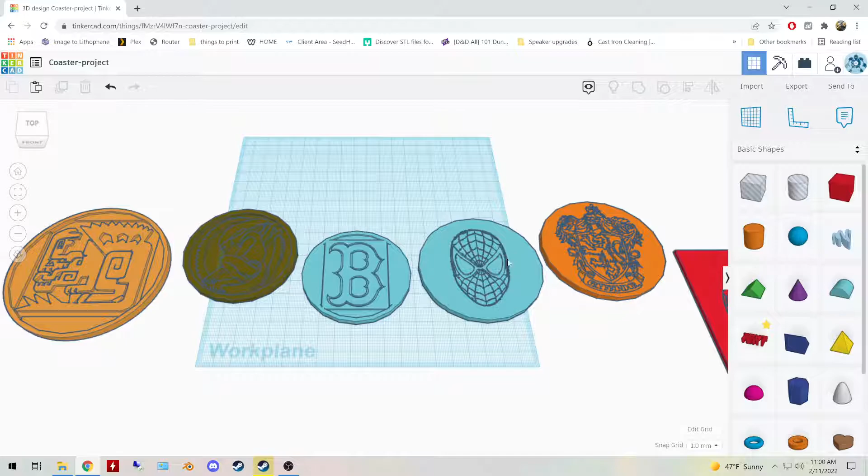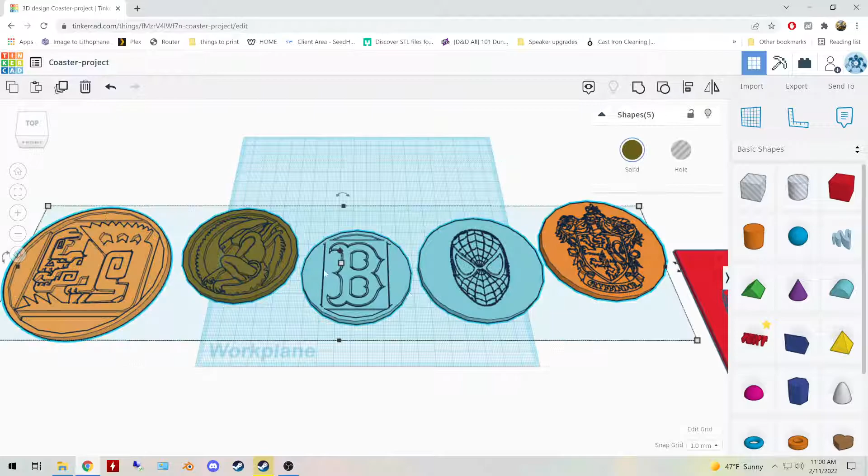And we can jump right into Tinkercad. These are the 5 coasters I showed earlier in the video. Obviously these are in STL form, as well as one other design over here that I didn't show. As you can see, there are a couple different design approaches on display here, which I will now go over.

Let's get these out of the way. First things first, let's import the SVG we just made. I did the symbol of the Alien movies, so I'll import that.

Depending on what image you started with, the dimensions might be highlighted red and you get a message saying the image is too big. But you can just highlight these, and if you punch in a number, Tinkercad will automatically scale the other side. It doesn't really matter what number you punch in, because resizing them in Tinkercad will be super simple.

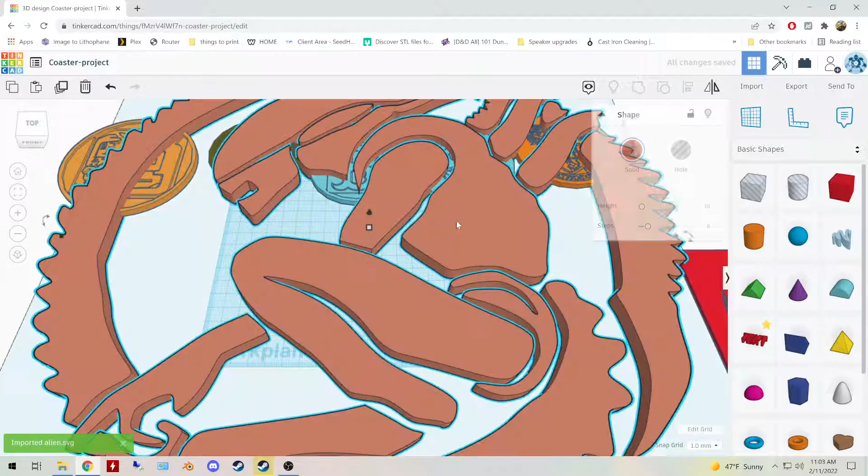Importing sometimes takes a while. There we go. It imported pretty big. Odds are yours did too, but just highlight one of the white corners, hold down Shift, left click on it, and scale it down a bunch. Something a little more manageable. Make it a little bit taller.

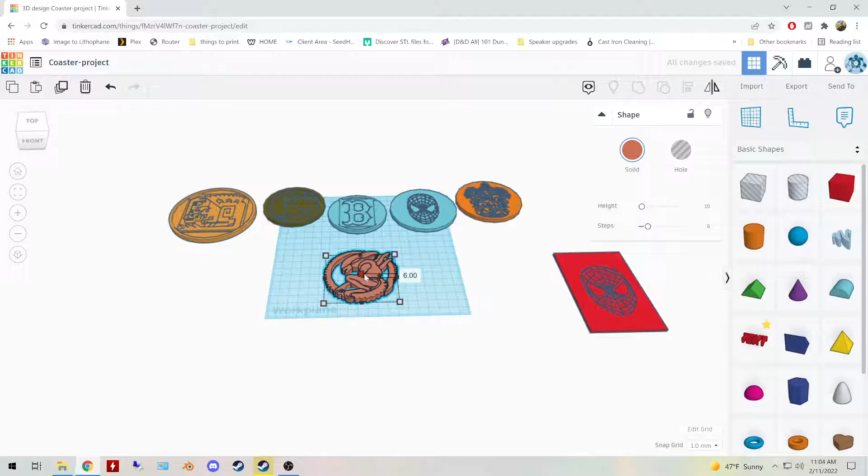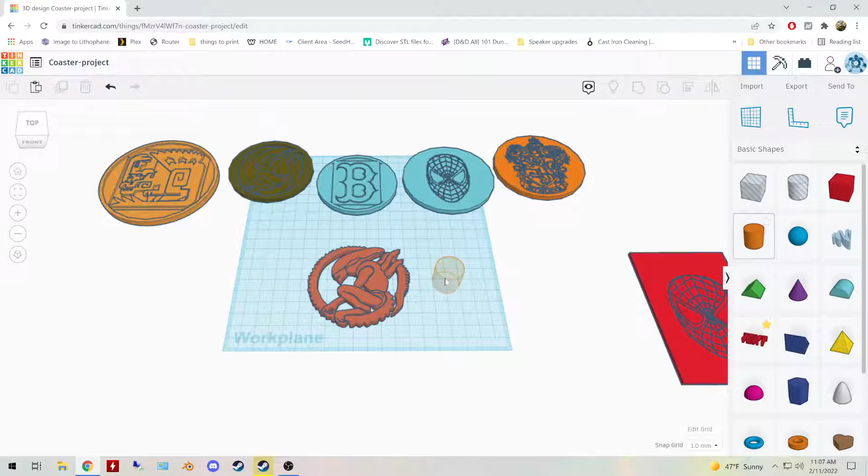From here, the design is a little open-ended. I'm going to try to make a coaster, or maybe a magnet, where you'd glue the magnet on the back. So I'm going to use cylinders, but you could just as easily use any shape that is flat or can be flipped flat—box or rectangle, roof or triangle, heart—all those will work fine, but I'm going for a coaster, so I'll use a cylinder.

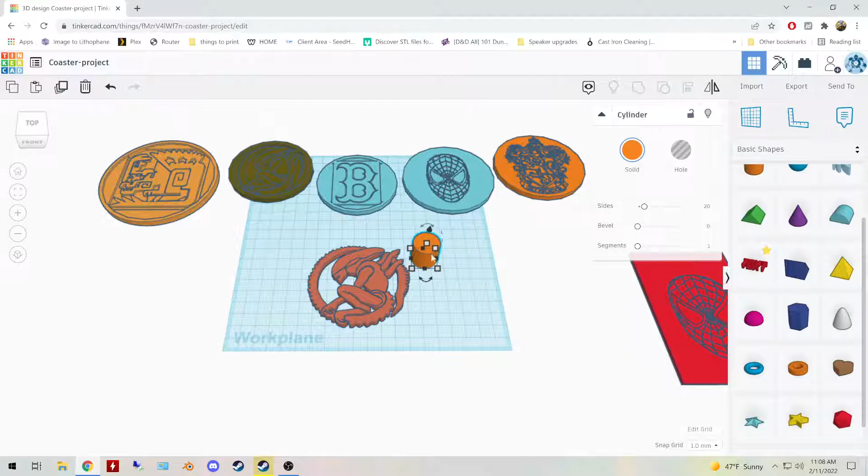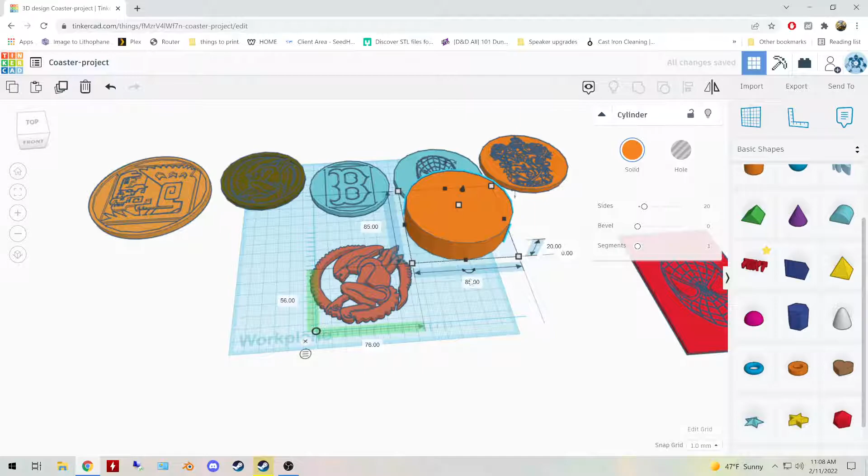I'm going to drag this out. I've found good dimensions that work for this—it works just as well if you want to make a magnet—so go for something between 80 and 90 millimeters. I'll make this one 85. You can set the top to bottom height to either 4 or 5 millimeters.

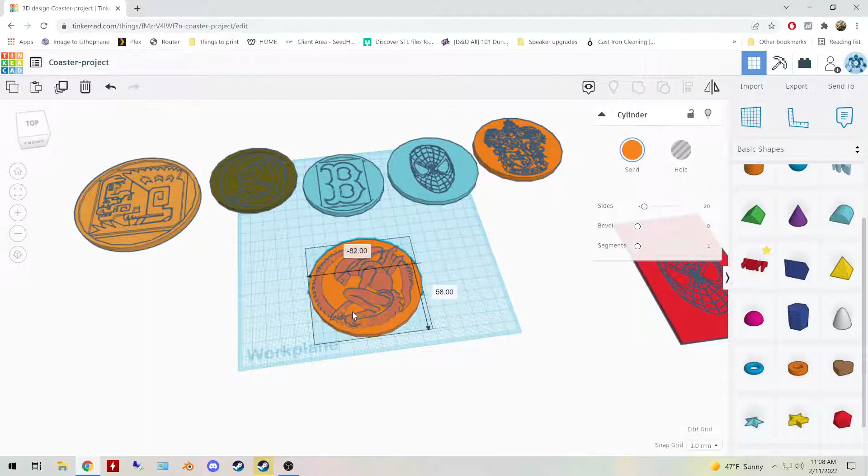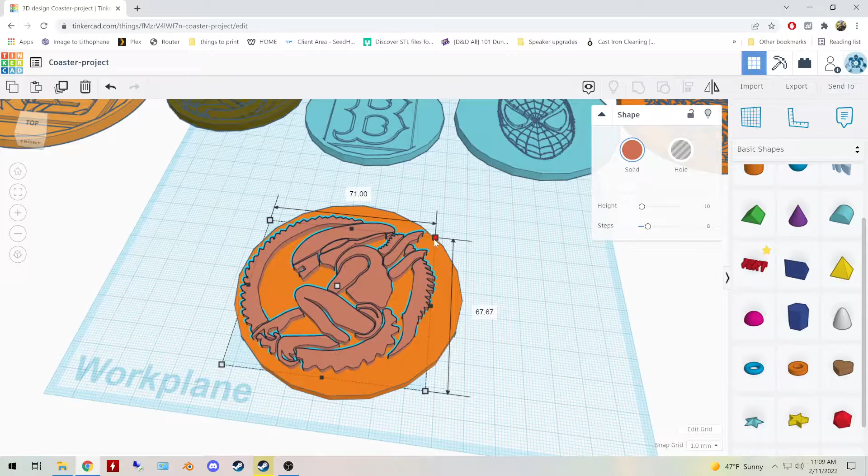Dismiss the ruler. As you can see, I actually wound up resizing the SVG almost exactly, but you can tweak it a little bit more here. Let's lift this up a little bit so we can resize it easier. As you can see, that's poking out just a little bit, so we'll resize it just a tad and reposition it.

All right, I think that's a good size. Maybe we'll lift it up just a little bit. Okay.

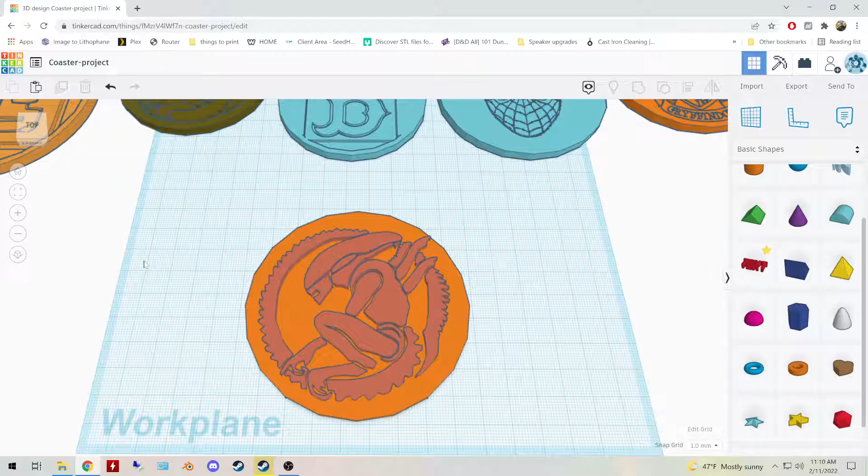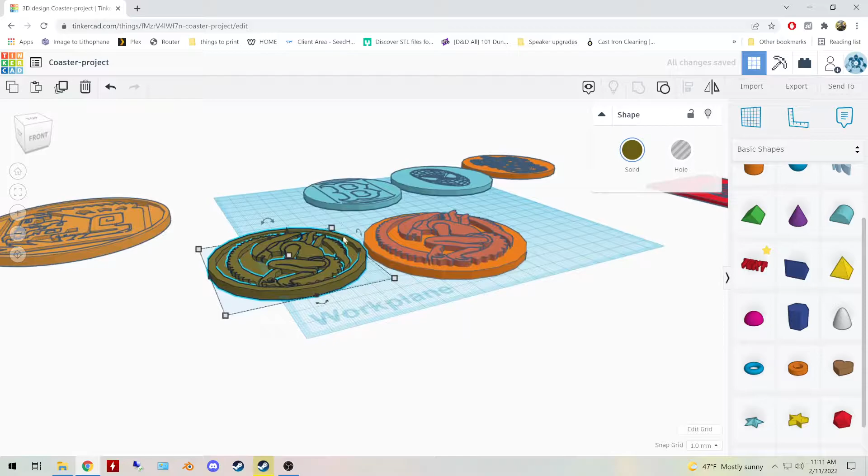From here, I like to think there are essentially three best approaches. We can carve out a rim on the coaster and have this alien symbol solidly sitting in it, shown here—you can see it's sitting in the middle, everything nice and flush.

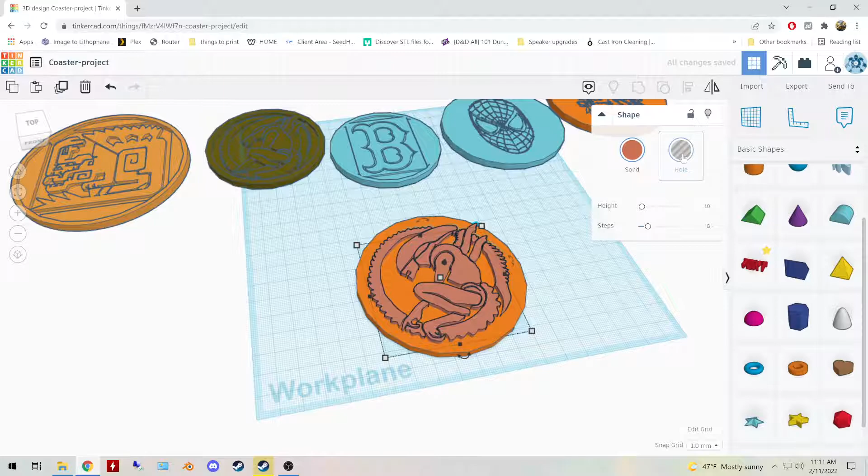Or you can dip the solid object a little bit below the rim to make a small barrier around the coaster, as I did here. Or you can just set this to hole, make some adjustments, and basically punch it in the middle, like I did with the Spider-Man and Gryffindor logo.

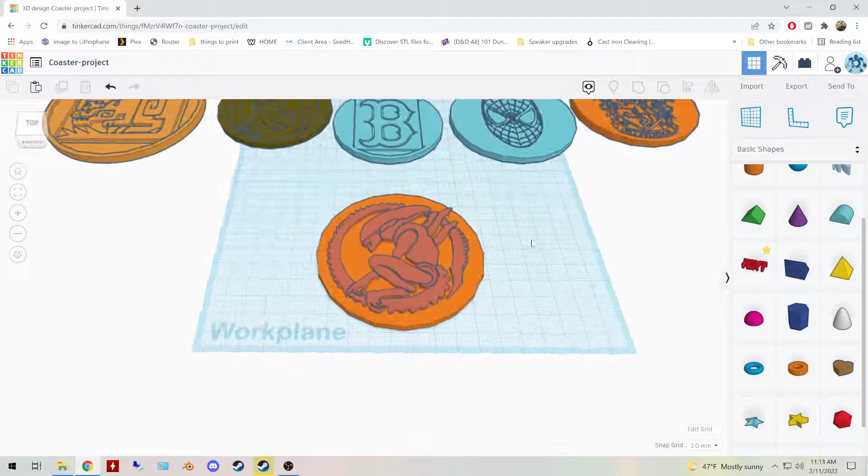If you've watched my other Tinkercad videos, you probably already have a good idea of how to do each of those three designs, but I'll go over them anyway.

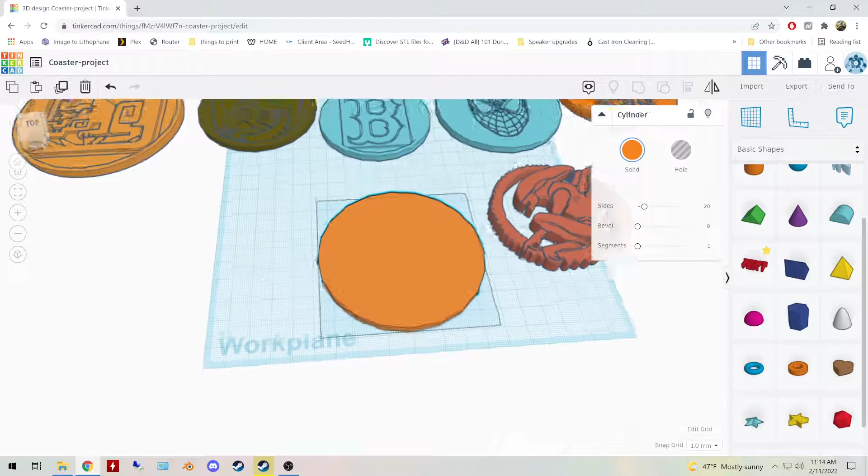So we can push this off to the side for now. What we're essentially going to do is select our cylinder or box or whatever shape you're working with, duplicate it, and drag off one of these to the side. We basically want to subtract the dimensions just a little bit from the original, something in the ballpark of 2 to 5 millimeters. So our original is 85.

I'm going to bring up the ruler by hitting R on my keyboard. The symbol for it is also up here. I'll subtract 3, so I'll make these dimensions 82. Then we can dismiss the ruler, and we just need to move the slightly smaller object up 1 or 2 millimeters. Easiest way to do that is to hold down, on Windows, the Control key. On Mac, I believe it's the Command key. With that held down, just tap the up arrow on your keyboard once or twice.

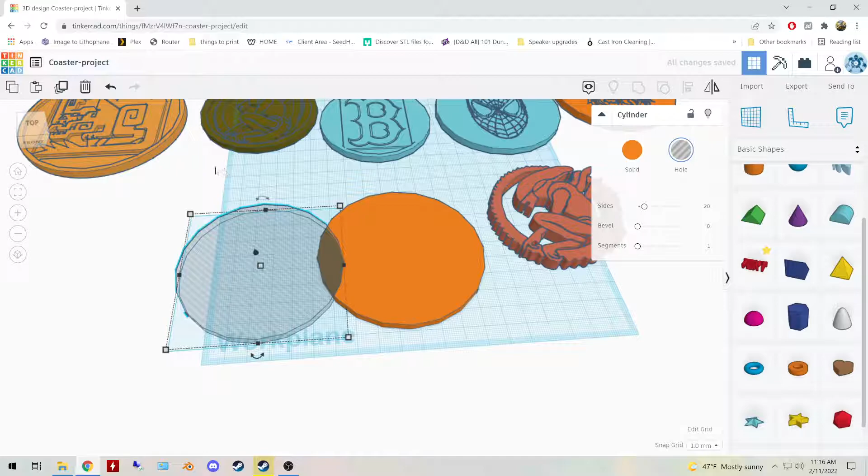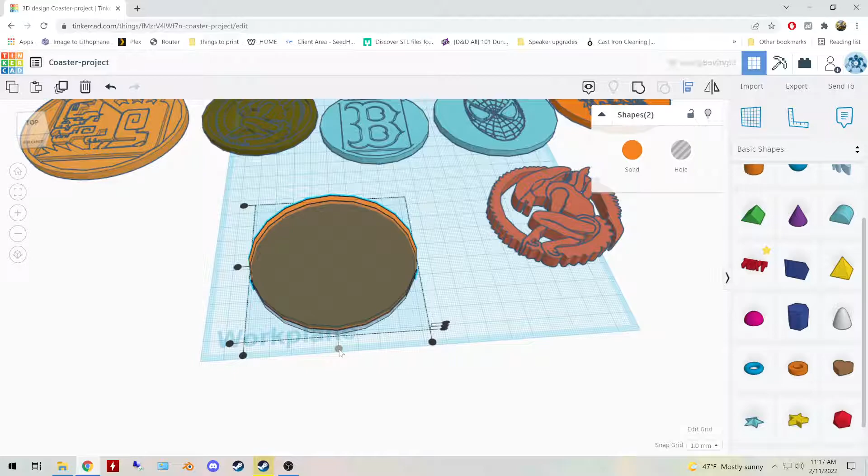You can change this to hole as well. Then on an empty space on the work plane, just hold down left click to make a selection box. Highlight both those objects, and up here where my cursor is, the align tool. We can click that, and we want to center align on the X and Y axes, so we can ignore these three dots over here, just these two middle ones. Click them, they should gray out, this will be center aligned. Then all we have to do is click the group button up here next to the light bulb.

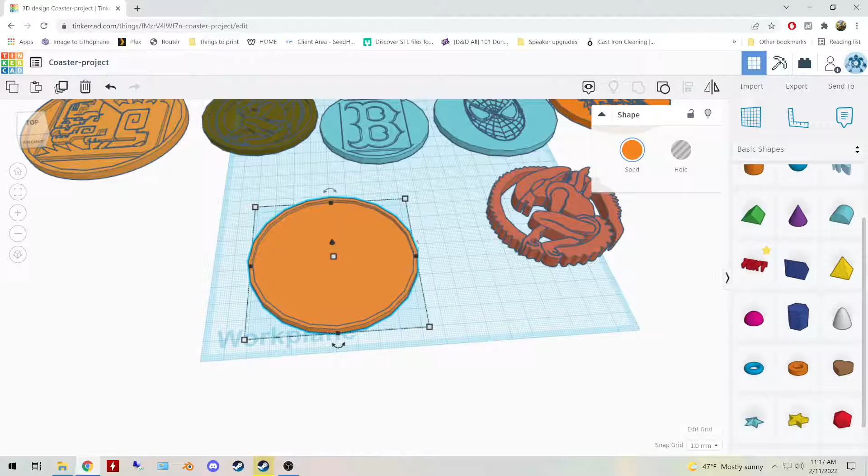It will carve out a little chamber for our object and give the coaster or magnet a nice looking rim. Then all that's left to decide is if we want our imported SVG symbol or logo to be flush with the top or sunk in a little bit.

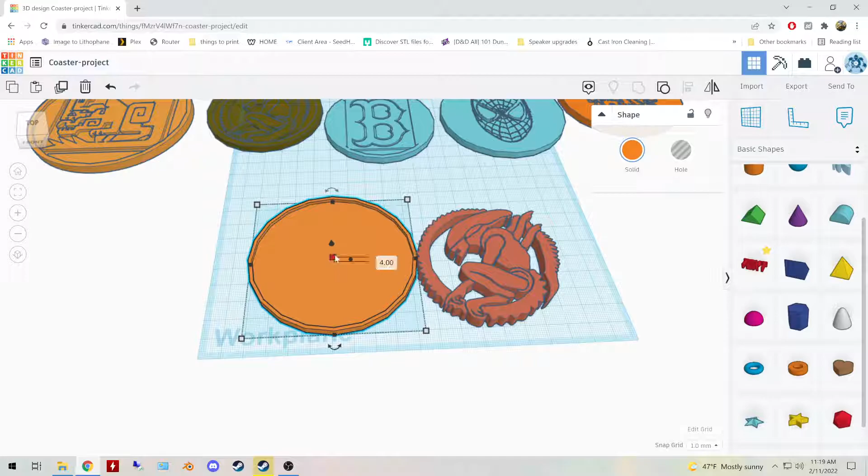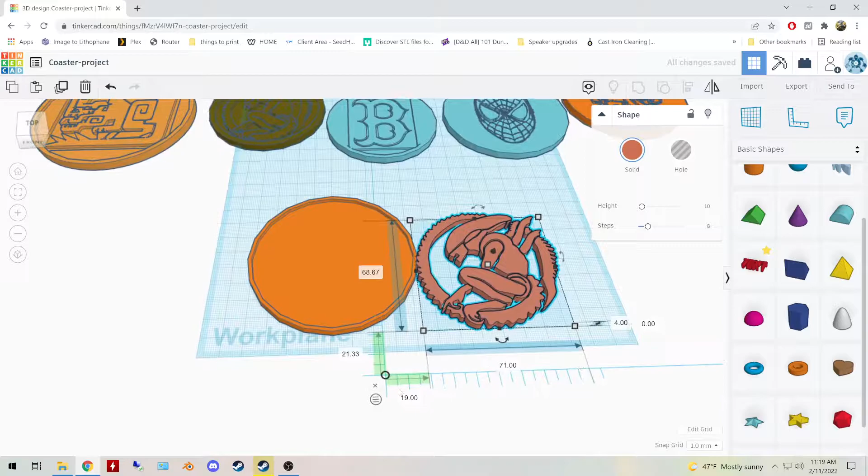So if we want everything to be flush and even along the top, it's as simple as going, all right, that's 4 millimeters tall. We'll select this, bring up the ruler. The top to down height is what we'd want to change. You can see it's got the up and down arrow. We'll just change the 7 to 4, hit enter, dismiss the ruler.

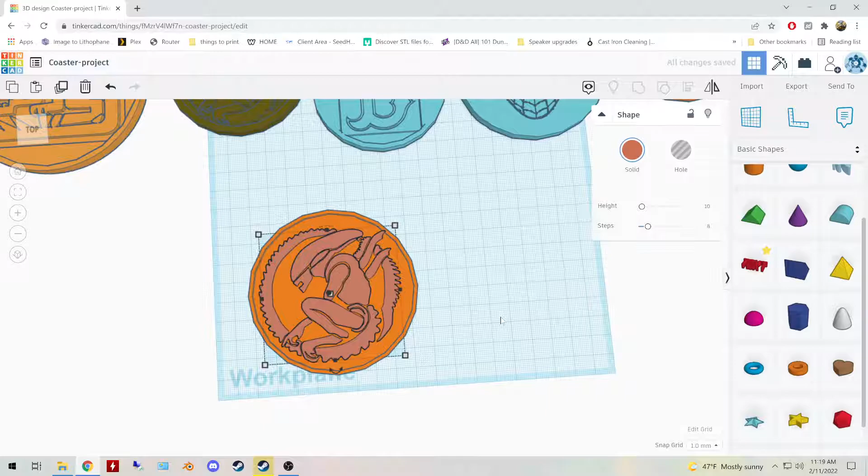You could try and align these if you wanted, but we're probably working with a pretty uneven shape, or at least I am here, so I'm just going to eyeball it in there. Use the arrow keys to arrange it. Then all you need to do is selection box, group, and you're done. If you want the symbol to sink a bit, just ungroup that.

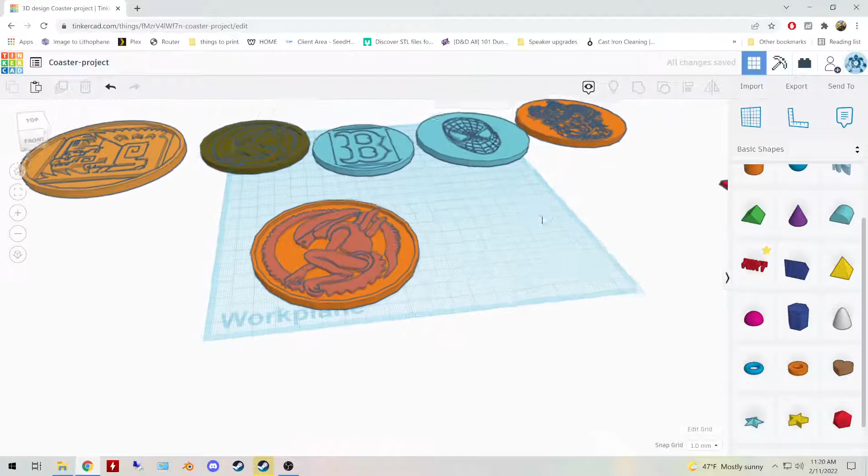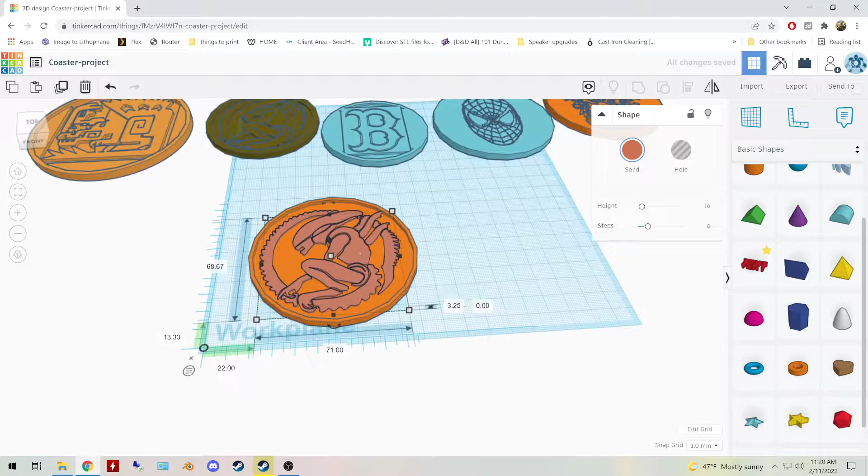It's really as simple as this, but obviously you would want to change the height. So you probably want this to go from 4 to 3.5 or 3. Split the difference and say 3.25. Then just dismiss, and group again.

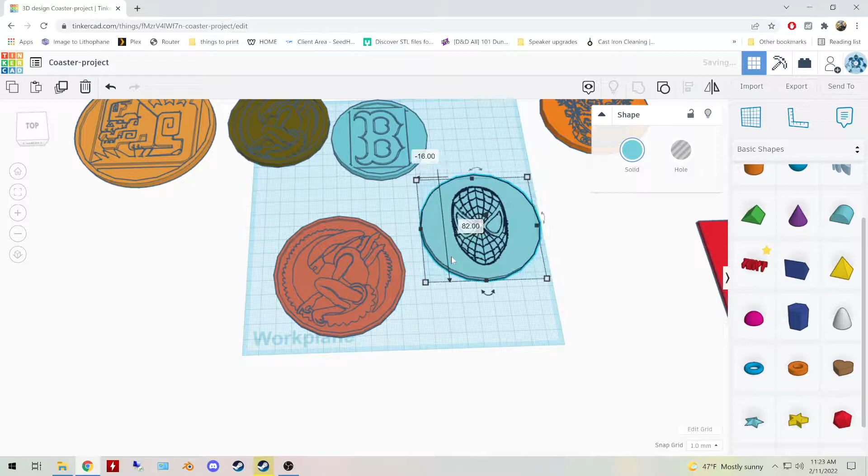As you can see, it's sunk down a little bit. We've got a little barrier going around our symbol. For the last approach, which is setting it to hole and carving out the symbol in the middle, I'll just go ahead and undo these steps I did.

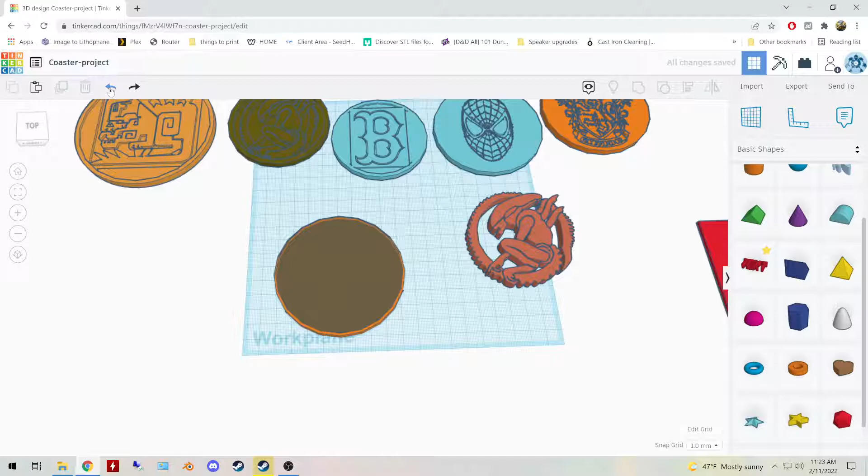Get back to the basic coaster. Delete that. It doesn't really matter what height this is. Just go ahead and set the imported symbol to hole.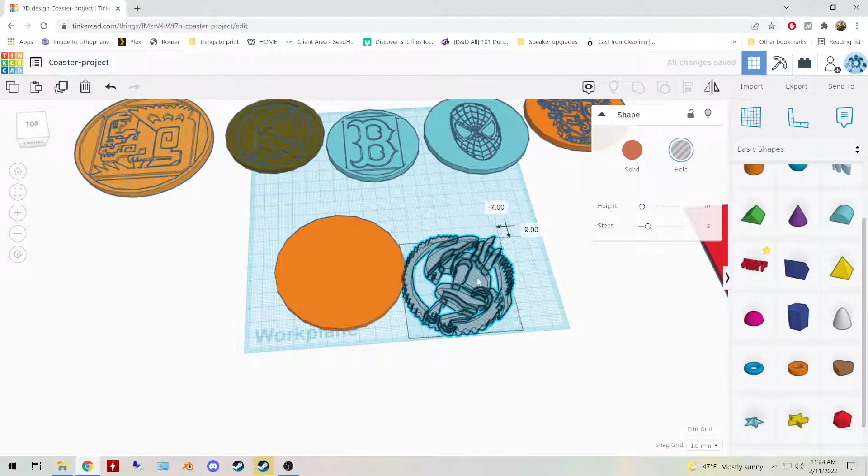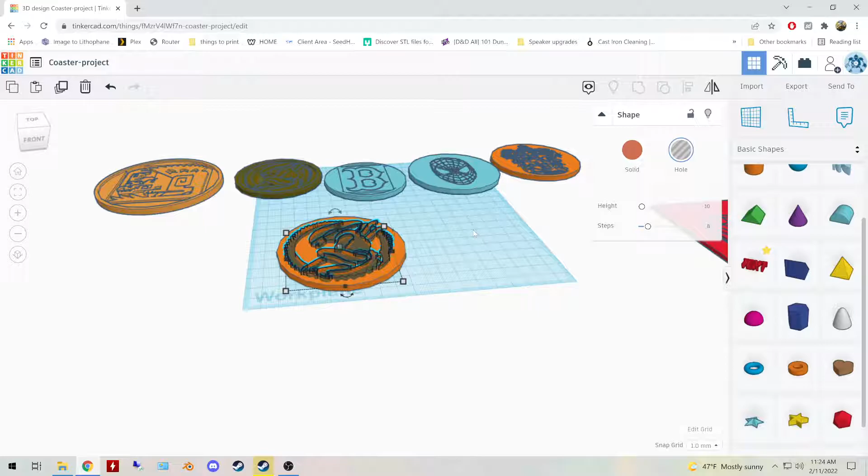Again, we can just eyeball it. All we need to do is push it up as deep as we want to make it. So we set our base object at 4 millimeters. Right now these are even. So if you want your carved in symbol to be as deep as it can be, just select it when you have it positioned how you want. Hold down Control or Command, tap the up arrow once, and then group it.

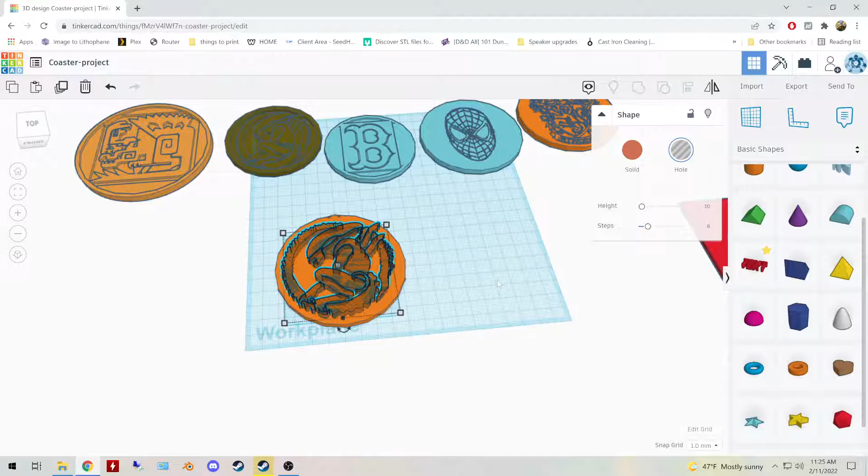I'm going to push it up a little bit. This is 4 millimeters tall. Every tap on the up arrow key you can think of as 1 millimeter. So you don't want to put it up 4 millimeters because then it won't carve anything in at all. So I'll punch it up 2, and group.

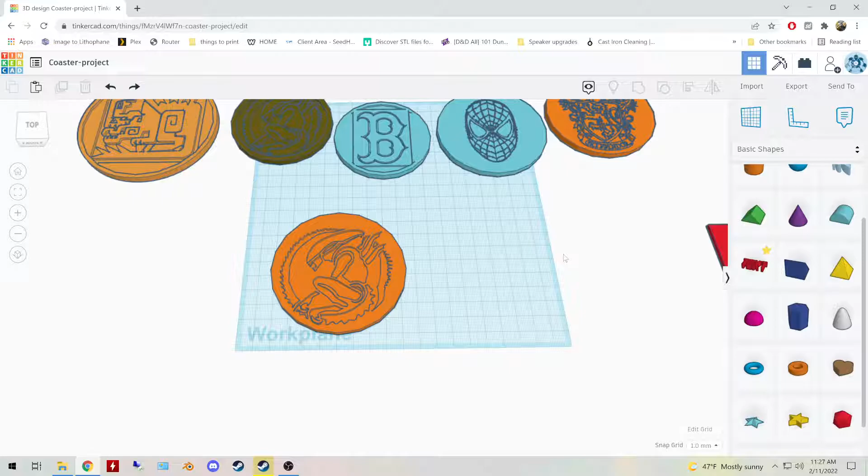And yeah, that's pretty much it. If you want to get really specific in how that works, I'll go ahead and ungroup that and bring it back to the base level. This thing down here called the snap grid actually determines the distance in which the objects move up or down.

So if you really want this to be punched in as much as it could be, you probably don't want to do 0.1 millimeters. That's probably way too deep, the bottom is going to be paper thin. But we'll set it to 0.25, just give it one tick on the up arrow.

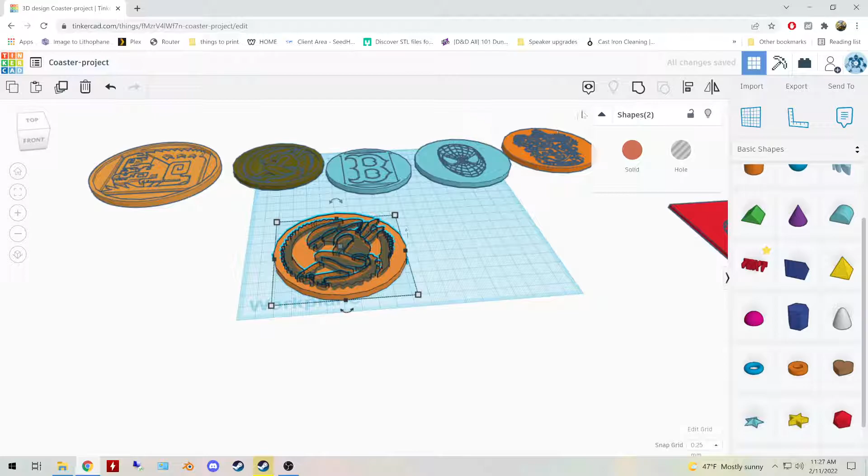And as you can see, that is significantly deeper. Or you could make it as shallow as can be by bringing it up to 3 ticks and then changing this to half a millimeter, essentially going 3.5 millimeters up. It's all about how you want it to look.

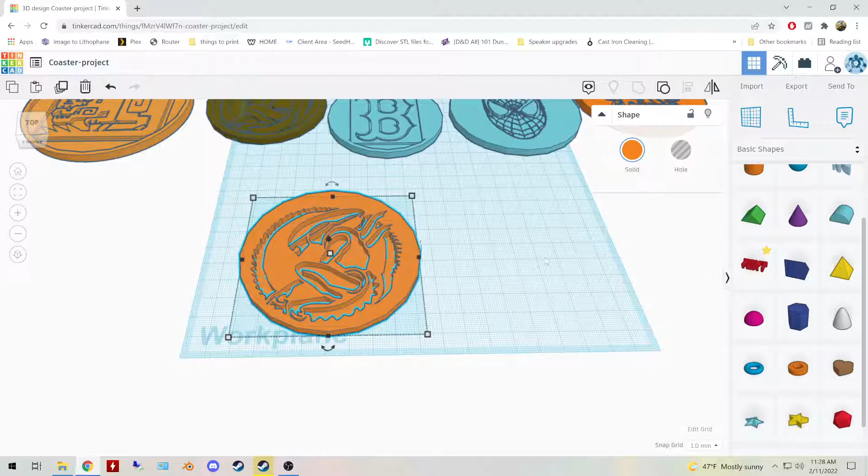You're also not limited to just working with the imported object and what your base object is. Here on the Red Sox symbol I did, let me just ungroup this. I liked how it was sitting in the middle, and I liked the rim, but I didn't like these empty spaces to the sides. And as you can see, these are just...

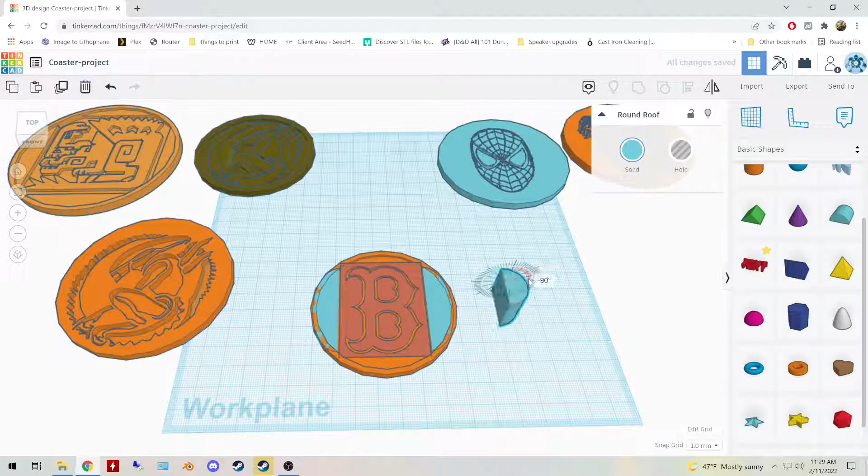resized. I believe it's the roof object, round roof object. Yeah, I just brought one of these over, flipped it around, resized it, and just mashed them together and grouped it.

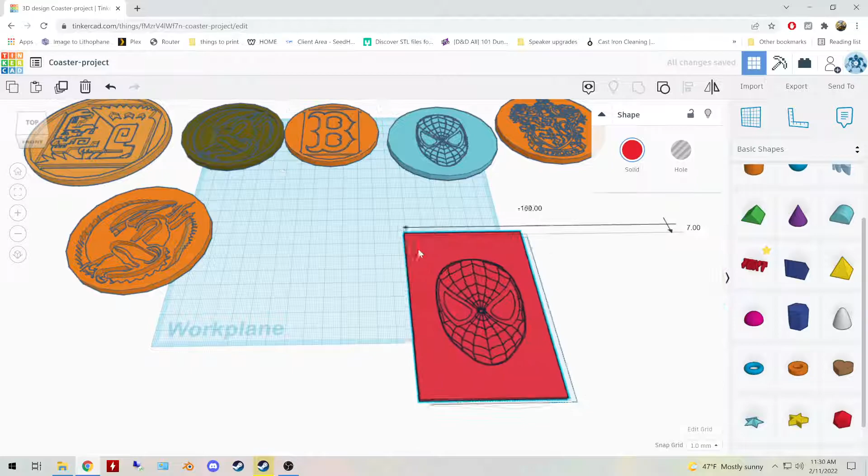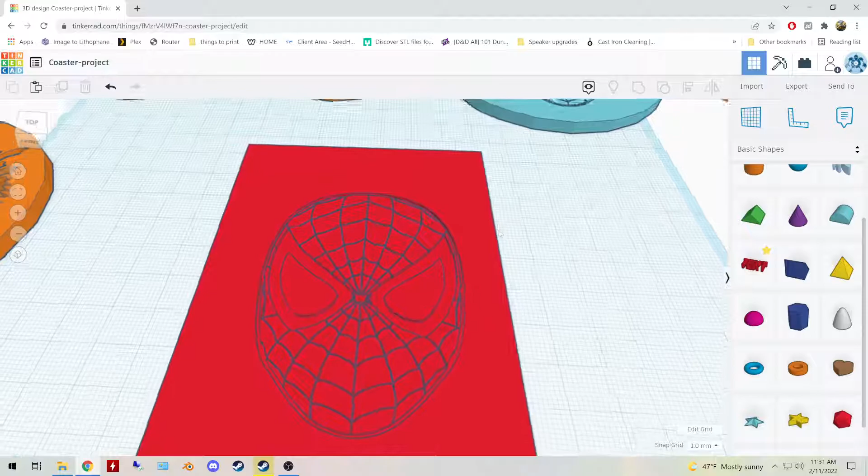You also might wind up with some weird kind of artifacts when you import or group your SVG. Let me just bring up an example here. So this is one of the Spider-Man logos I did. As you can see, I wanted to carve it into the middle, but I got these weird kind of things in the middle that aren't going to be too 3D printer friendly, and just kind of make the whole thing look weird. I don't like it, and odds are you don't either, so how do we get rid of them?

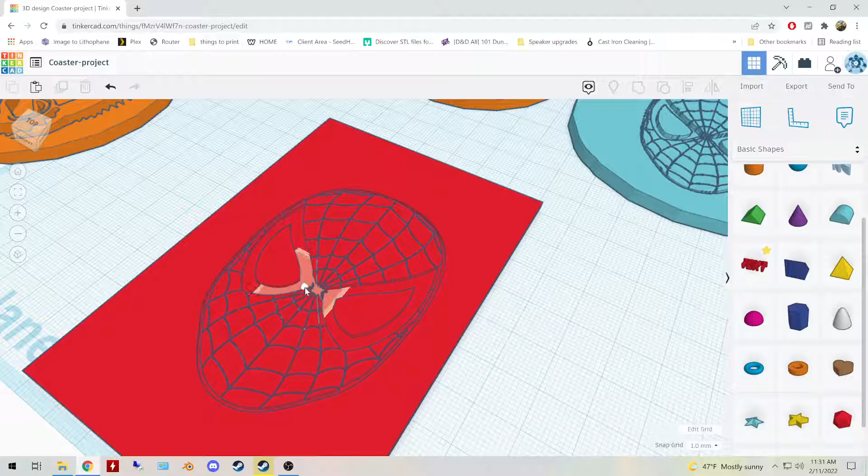Well, in this instance, I'm going to hit W on my keyboard. I want to bring the work plane on the surface that the weird artifacts are on. You won't need to do this if you import it and notice it right away, you can just start working with the base work plane. But I noticed these when I grouped them, so I'm going to bring over the work plane, set it to there.

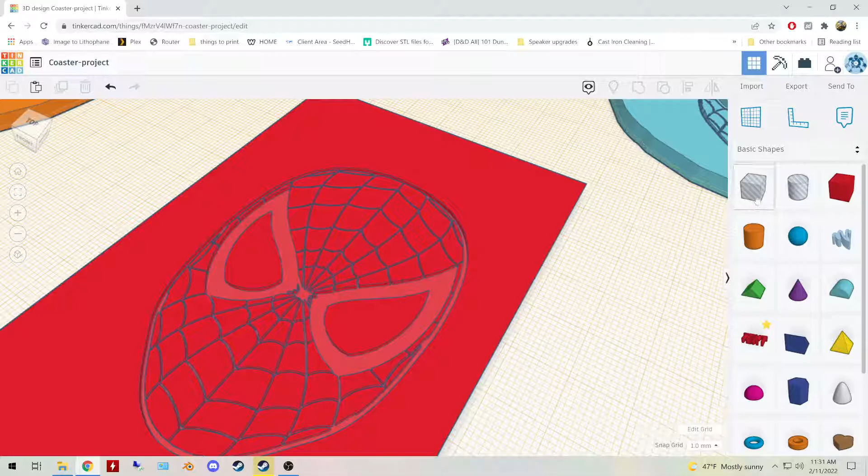And then we can just kind of drag out a whole box, and just follow the outline until it eats away at what you want to get rid of. I could probably resize this a little better or use more objects to avoid cutting out the tops of those pieces. But I'm going to decide it's not really a big deal.

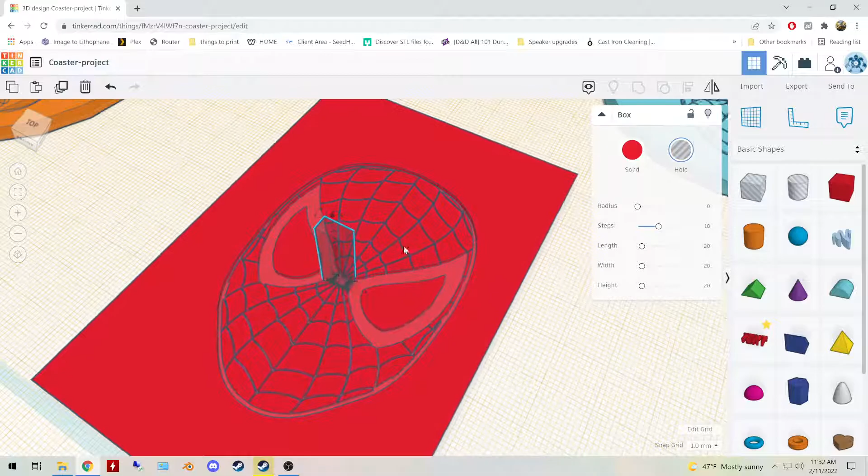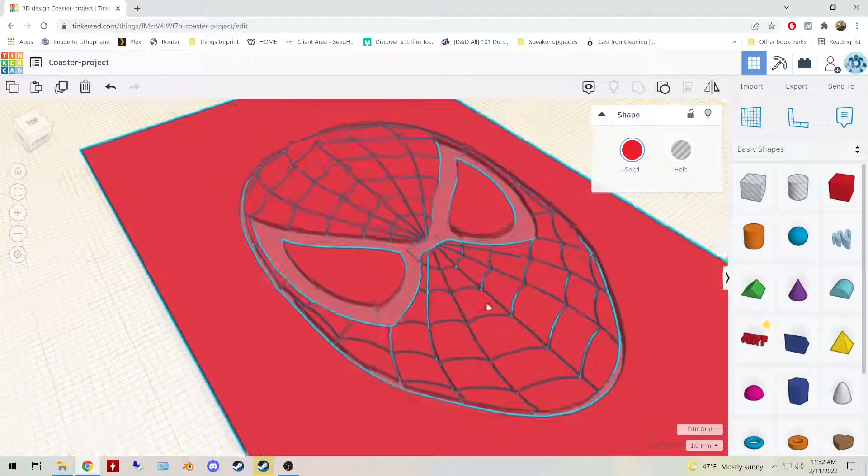So I'm going to position that and group it. It might take a little while depending on how many objects you're working with, how many SVGs you imported. But there we go, artifacts removed. And don't worry about any of those outlines if you see them. If you did the work plane correct and your whole object was flush, this is just something weird Tinkercad does. When you actually 3D print it, it won't show up.

And like I said, I'm pretty much designing coasters here, but this entire method works just as well if you want to make your own fridge magnets. You could just 3D print this, glue a magnet on the back, and you've got a fridge magnet. I will say that you still probably want to attach it to some kind of base.

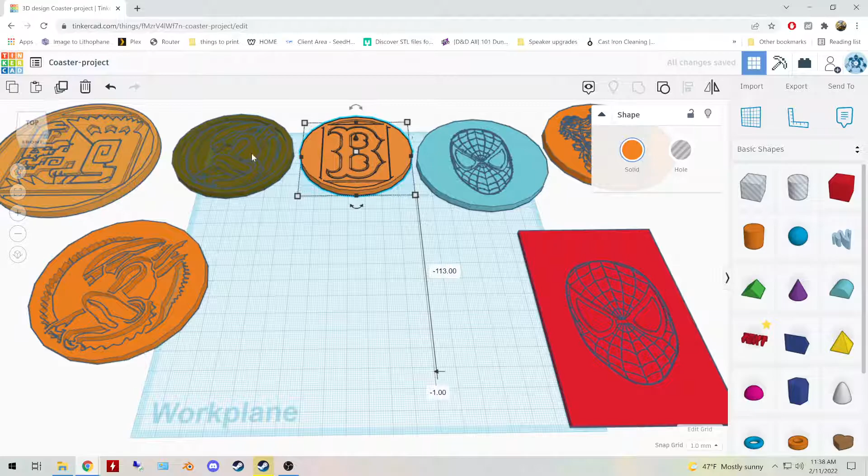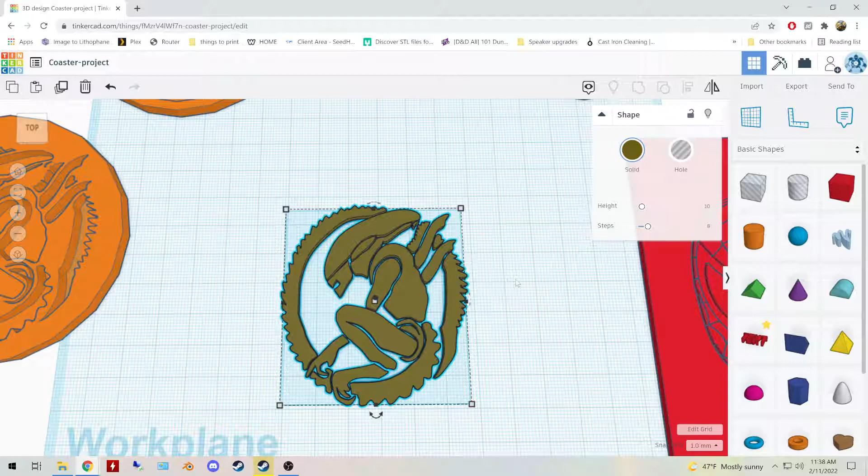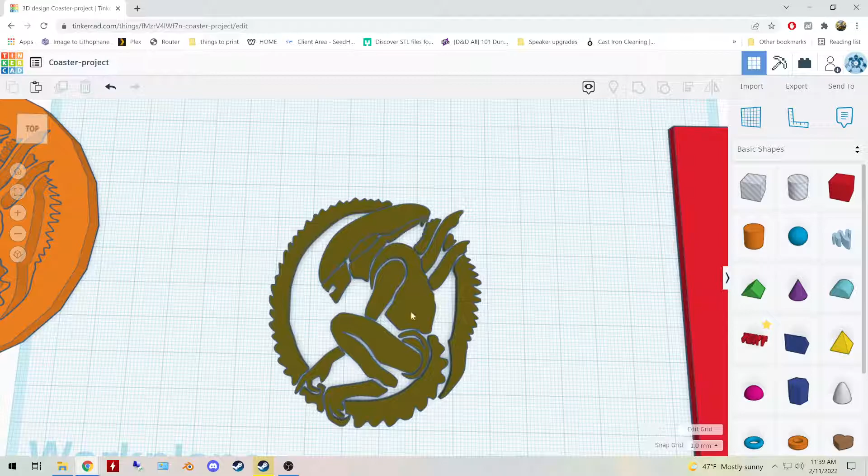Let me just ungroup this for a second here. Just because you might think this looks cool and I'm just going to 3D print this and put a magnet on the back and it'll look great - but it won't, because if we zoom in here, this is going to 3D print as just a bunch of disconnected pieces. So you'll just wind up with a bunch of loose pieces that you can't really assemble anything with, much less attach a magnet to. So just attach a base to it so everything sticks together, print it, glue the magnet.

And that's pretty much it for importing SVGs and turning them into your own coasters and magnets.

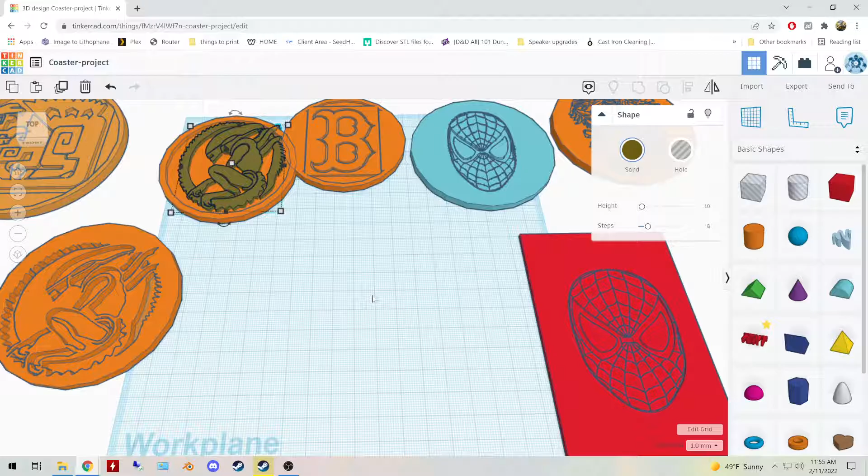One final thing to mention is that you can paint 3D printed objects. A couple of examples here. As you can see, still very much works in progress - they need a couple more coats of paint. Spider-Man's eyes need to be white. But yeah, these are great things to start with if you're new to painting, especially painting 3D printed things. All you need is to give them a coat or two of acrylic primer, then grab some acrylic paints, and then just start having fun.